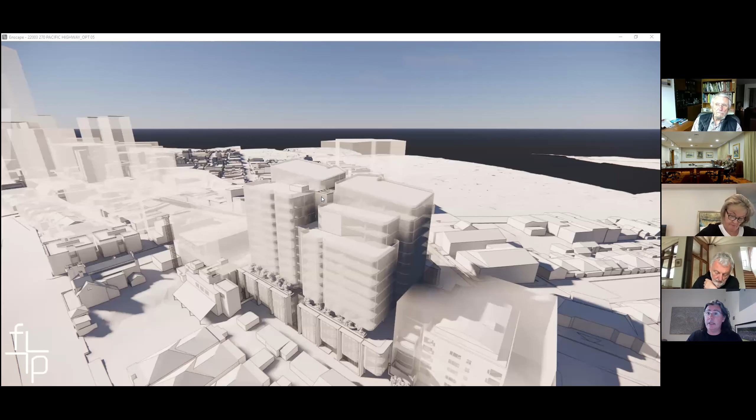So the 59 metres is - and council have observed that they wanted to reduce it to 54, and that 54 should be able to accommodate 13 stories. That may very well be the case. Having said that, what we've sought to do is tier the top of the building. So rather than having a flat level across the entire top of the building, we've tiered it down so that its lowest corner is the southwest corner, which is the leading edge of shadow.

If I jump to some sections, this might become a little clearer. So the red box that we're looking at overall is the height plane that sits inside the shadow envelopes provided by the 2036 plan, and you can see the building sits well below that.

We've additionally, in organizing the 5.6 to 1 above ground, created additional setbacks to the west, to Pacific Highway, and indeed to the two sides as well, and lowered the building. So in essence, what we're trying to do is get the plant room in this top corner, which is the northeast corner of the site that has the least environmental impacts in terms of overshadowing.

Now it's a taller volume than potentially it needs to be. Because this is a planning proposal at this stage, we've left that line run straight through to the top of the building, but there's more than enough room in there for the plant room at the moment. I guess our view of it is it sits inside all of the controls, both in terms of that it's 13 stories, it sits inside the setbacks, and it sits inside the shadow plane.

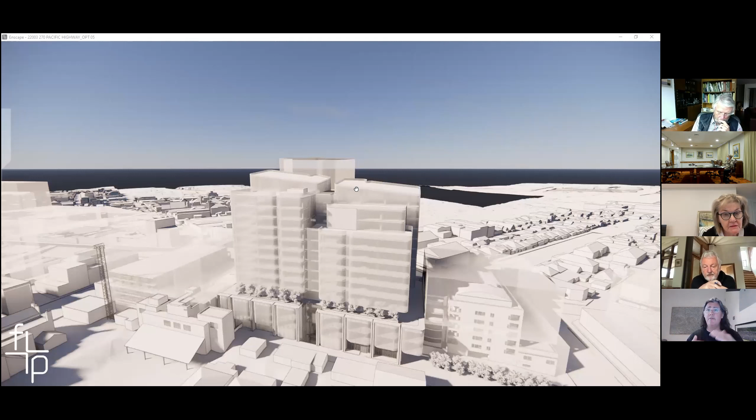We feel like the best time to define the actual top RL of the building will be at DA, when we get more services input and information, because we're constraining the services to the northeastern corner, particularly in the taller volume. We're trying to avoid having to come back and discuss things like cooling towers, which can easily get up to 6.5 to 7.5 meters in height with attenuation on top, and avoid them breaching a height plane. So we've given ourselves some flexibility. We don't think we'll need the whole thing, but we think the time to make that decision is during the DA. So we'd like to leave it where it is, at 59, for the time being.

That was pretty much all I had to say. Right, very well. Clearly height is one of the issues the panel is interested in, and I'll first open it up to other panel members to ask questions. James, John?

James Harrison. I've a quick question for Paul. Given that the North Sydney Council LEP allows architectural roof features, and those features can screen plant, why do you need 59 meters? Why doesn't it work with 54 meters? Well, the simple answer is I'm not sure whether it does or doesn't, because we haven't done the services analysis yet — it's only a planning proposal at this stage. We haven't done the detailed services analysis of what that plant room needs.

I'm just saying we're probably better off giving ourselves some flexibility, and given we fit inside the envelope anyway — the shadow envelope, that is — we didn't see any reason not to give ourselves the maximum flexibility in the first instance, and then design it down once we get into detailed design. Obviously from the client's perspective, he doesn't want to build a taller building than he needs to. The area we're talking about is plant room, not additional floor space.

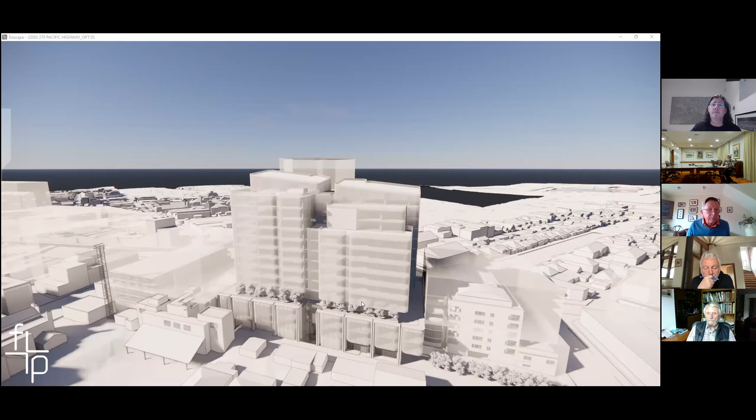Thank you, no more questions. Jen: just following on from James — the council's LEP allows for something like 5.6 meters for an architectural roof to camouflage plant etc. That in itself seems quite generous, so we are concerned about the extent of the additional 5 meters.

Okay, so where are we at then? Sorry, back to your point about the architectural roof feature — it's something I'm happy to carry on with, being at 54 meters as council suggests. I guess we just thought it made more sense to have a bit of flexibility at this point, given we haven't done the detailed design. But if it sits inside all of those envelopes, and if it's the view of the panel that it should proceed with 54 meters instead, relying on architectural roof feature clauses if we need them, that works too.

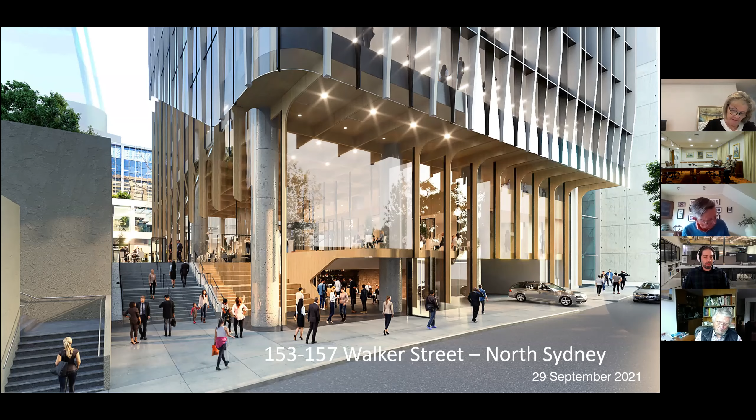Thank you for the introduction. My name is Marco Demick. I'm design principal with Architectus, and we're the architects responsible for this planning proposal. I'd like to thank you for the opportunity to address the panel and provide a response to a few comments that have been raised since last Thursday.

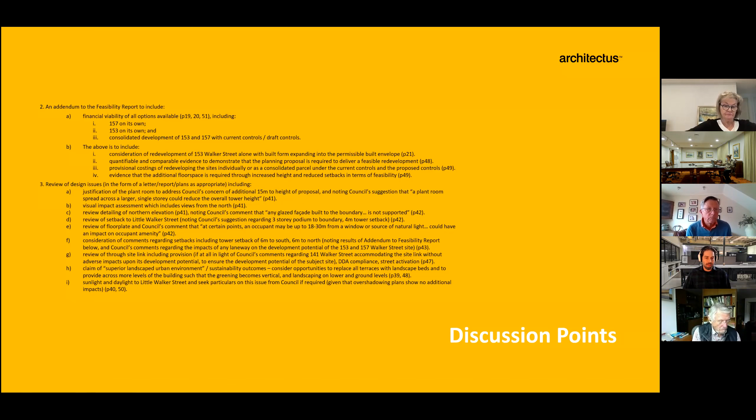As mentioned, the proposal is a result of two years of design iterations and discussions with the council. This was all quite rushed, so I'll quickly go through the key points, and I'm happy to answer any questions at the end, or ideally subsequently meet with the council to work together to get the optimal result.

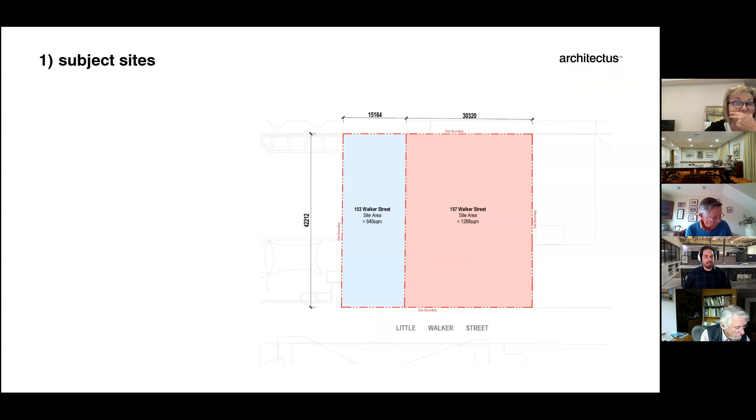I'm sure you're familiar with the subject sites and relevant site areas. There's the small site area on 153 and the corresponding site area on 157, which is still a reasonably small site on its own. While it can be developed under the LEP, it's still a reasonably small footprint for commercial development. The amalgamation of these sites is essential in order to provide a high quality contemporary office development. It allows for sufficient size to provide public domain benefits, building articulation, and the ability to design a workplace responsive to current post-pandemic trends and environmental goals.

This slide simply shows that individually the sites are not feasible to be developed. In the case of 153, the current controls result in less yield than the existing building, for example. And in the case of 157, the resultant scheme cannot even reach a PCA grade quality, let alone provide any of the broader benefits beyond an extremely basic redevelopment—basically just filling the envelope and resulting in a very small NLA and reasonably poor workplace outcomes.

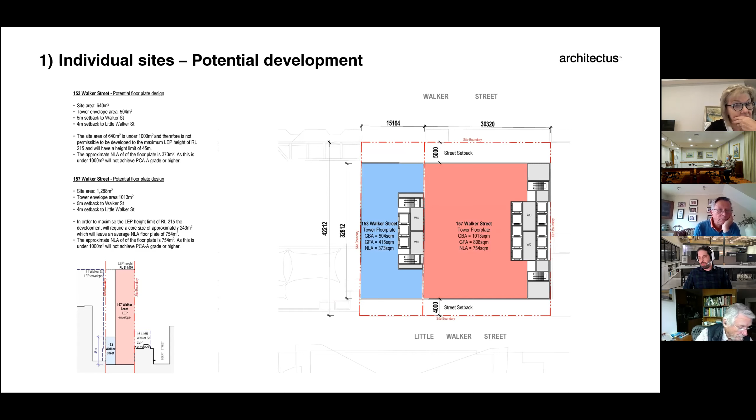In terms of individual sites on 153, even as a non-compliant development, we're obviously restricted, with the site area not being able to get to the maximum LEP height. The site itself is simply too small, even in a non-compliant manner, to be developed due to the small floor plate size.

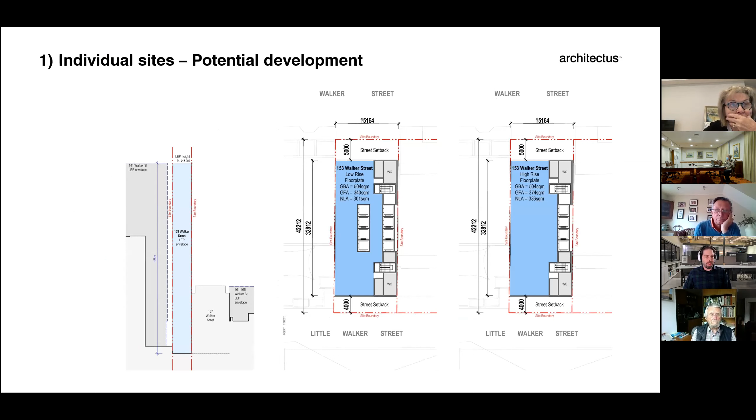One thing to note, as mentioned previously, since the submission of this application the council proposed new draft DCP controls, which through introduction of site setback further invalidate any redevelopment of these sites, including any ability to get sufficient floor plates even with combined sites. That's probably worthwhile noting.

However, the new DCP setback target, as explained in the accompanying documentation, is aimed at providing tower separation. This is not relevant to the northern boundary in particular, because the current LEP height and solar constraint on the adjacent site at 165 basically only allows for a small, four-story or so addition—purely because of the solar controls over Doris Fitton Park and retention of those. So the resultant development, even built to a zero setback to that boundary, will already achieve a difference of over 100 meters between the tower forms, and therefore achieve the intent of the draft DCP controls.

In summary, it's worth stressing that this planning application does not increase yield compared to the current LEP and DCP compliant developments. It has purely been designed to redistribute the allowable floor plate area by locking in a solar-compliant envelope. So when we're asking for the height increase, it's still fitting entirely within the solar footprint of the current LEP controls, and it can deliver a number of key public benefits.

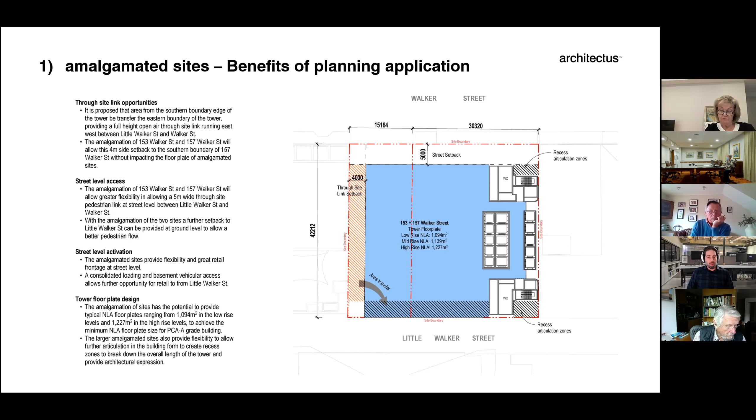The amalgamation and the planning proposal really allow us to substantially increase public domain, to redistribute the floor plate to create open-to-sky through-site links, provision of street activation and a DDA link between the streets, which is currently an issue, and ultimately a tower form that maintains the solar profile of the current LEP while having sufficient floor plate size for a high quality commercial building that can be articulated, so it's not struggling to achieve PCA grade required space or premium, and can provide an appropriate architectural response.

I'll just briefly go to some of the key items raised in the documents issued on Thursday. One note raised was the height increase and the plant room justification. The height increase isn't really there to achieve additional plant. The main intent is to make sure we can activate the floor plate, and while it does create some small plant space, it predominantly houses the lift overrun.

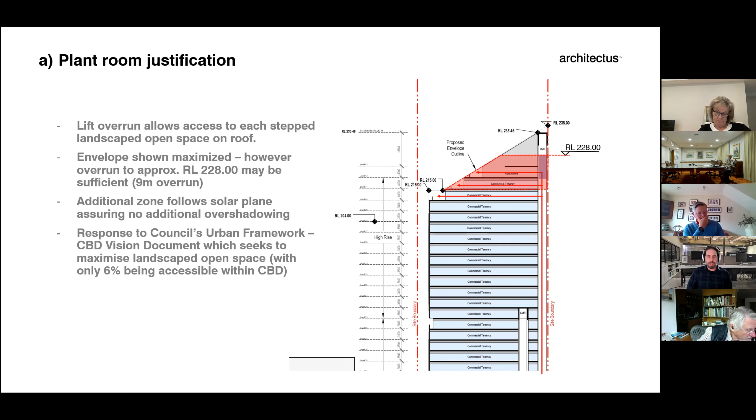That lift overrun allows us to access a series of communal open spaces within the roof. The actual form of the envelope presented in the documents is entirely just a solar plane above RL 215, and the form has been infilled to create an architectural response within that in a reference design. This response to create communal spaces is in direct response to Council's urban framework document, which identifies North Sydney CBD as devoid of properly publicly accessible space, with only 6% being accessible within the CBD. This allows us to create a series of communal spaces accessible to the inhabitants of the building.

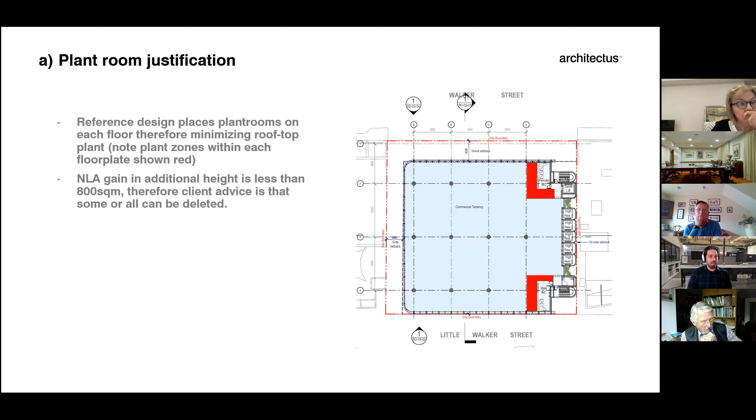As mentioned, the reference design places plant rooms on each floor, so it's a by-floor system. But as Alice noted earlier, one concession is there's a very small amount of actual NLA within that additional height. Personally, we think it'd be a pity not to utilize that height for articulation, with only 800 square meters of that space beyond RL 215 — something the client is certainly willing to delete.

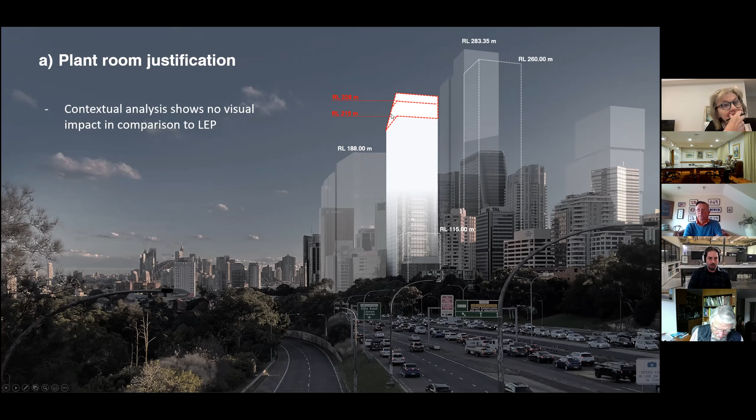Based on the contextual analysis, this is showing the envelopes. The 110 Walker outline, shown here as RL 283, has been submitted as a DA, and there are a number of sites alongside Arthur Street. We don't see that addition of height in the northern corner having a substantial impact — if anything, it sits equally within the general assembly of the building forms. The actual overrun to access only requires an additional 13 meters or so to reach those 3 levels. We've extruded that envelope based on no overshadowing to neighboring areas.

Another point raised was the visual impact of the northern facade, especially built to zero setback. What we've shown is an architectural response that places panoramic lifts alongside that facade, creating a dynamic and interesting architectural response. It allows us to ventilate the facade, and we're not reliant on any daylight access to the north, so it doesn't really affect anything in terms of development at 165.

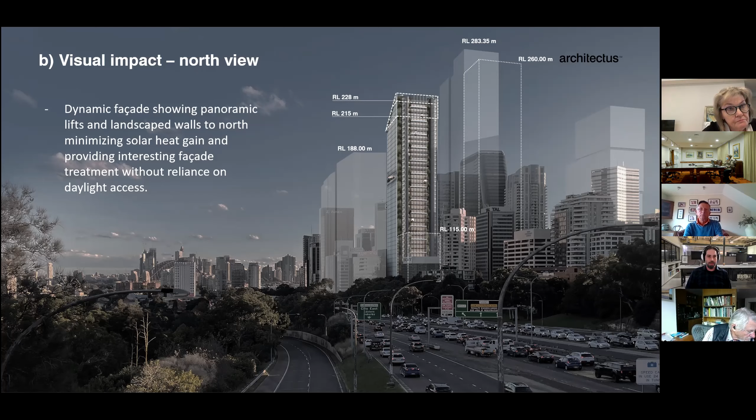You can see here in dotted lines the LEP compliant height of that development — only an additional 4 stories beyond the current building. You can see the big difference between those heights, which is in line with those targets, so there's no reliance on daylight access from there. By placing the core element, we allow for green walls and ventilation of those areas, and pyrolytic glass can deal with any boundary issues, effectively creating a mass to the north that deals with the environmental issues.

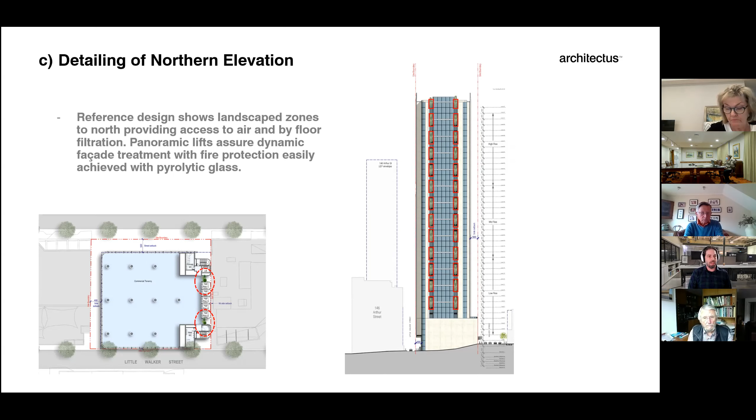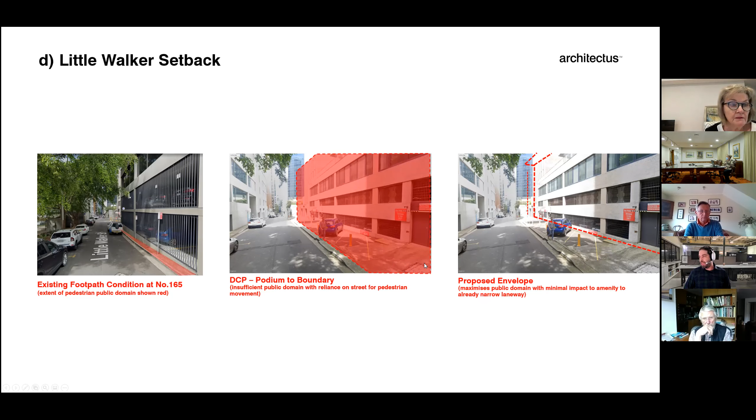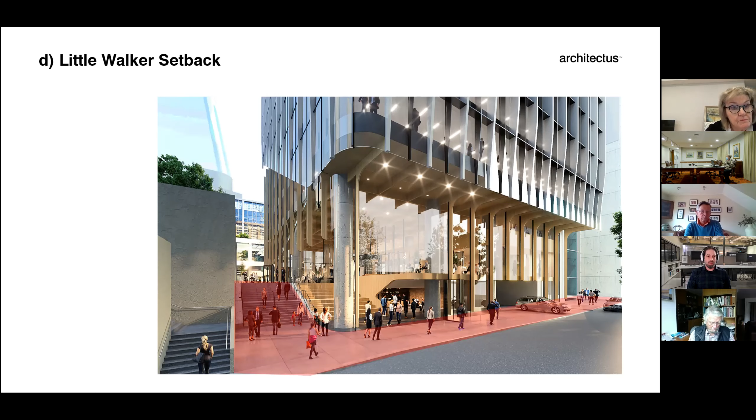What the proposed envelope does is create a recessed form at the base that allows for a 5 meter setback to Little Walker Street. It also creates a 5 meter through-site link connecting it to Walker Street, creating ample opportunity for activation and extension of the public domain within the building footprint, as well as the ability to create disabled access between the two streets.

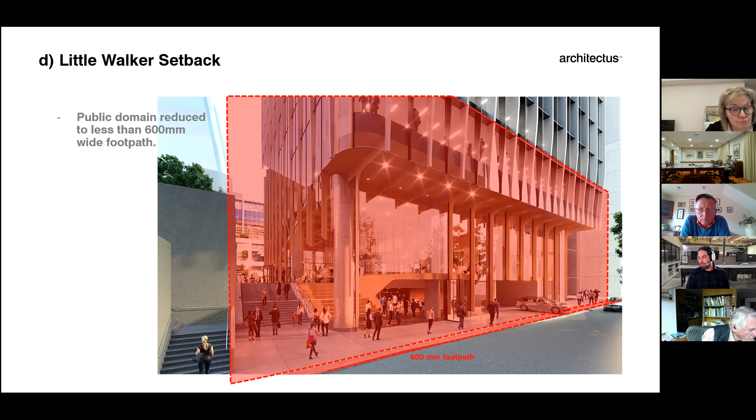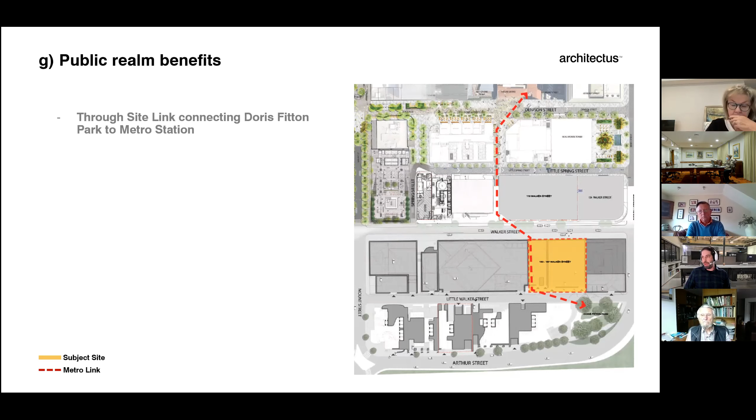In comparison, this is what a compliant podium envelope would look like, basically congesting that public domain entirely onto a service laneway. This has been developed over 2 years worth of meetings and negotiations with the council. It sits within a broader vision for the urban network of the CBD and creates an important link from the station in an east-west direction all the way to one of the few parks in the North Sydney CBD, the Doris Fitton Park.

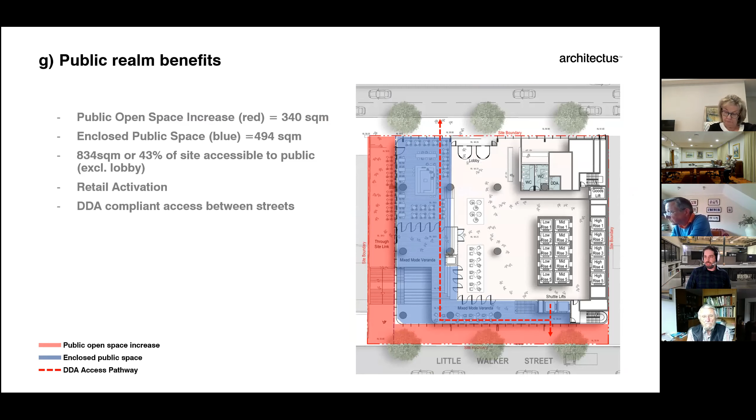In terms of the numbers, we are providing some 834 square meters, or 43% of the site, accessible to the public — this excludes the lobby, it's purely accessible space. The zone in red shows it open, and the zone in blue shows a mixed mode veranda, envisaged in the document to create a disabled link and transition between levels, as well as retail activation.

Just a couple of last notes — one on the floor plate size. It's very comparable to recent developments: 110 Walker, 100 Mount Street, which is one of ours, and 1 Denison. Again, well beyond PCA grade access to daylight, in premium grade territory, and it's reasonably still a small floor plate.

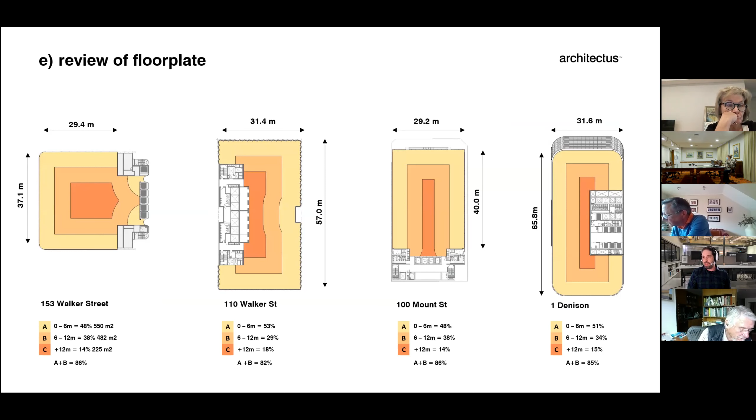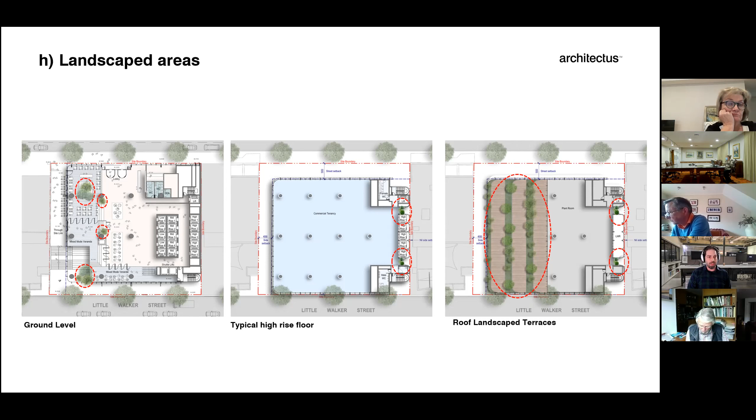The reference design envisages a number of landscape zones in terms of wellness and provision for landscape zones within the floor plate. That's exactly what the envelope allows us, because we're no longer so congested in trying to meet that 1,000 net PCA grade requirement.

Finally, the last point is one of the notes council raised: the issue of reversed setback to Little Walker Street. Obviously there's a huge benefit to that transition of floor space. So following the council meeting, we've taken that floor space from the through-site link and placed it onto Little Walker Street.

But as Elise suggested, our client, obviously if that's no longer supportive, and if that advice has changed, while it's a pity, we could consider putting that floor space back into that zone over the through-site link. That brings me to the end, but happy to answer any questions.

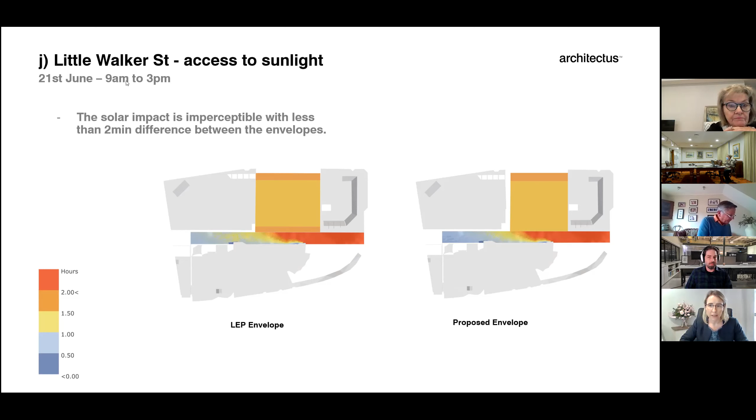Thank you. Perhaps if we pass to Josh now, because Josh was going to talk about the structure of our proposal and then summarise, if that's okay. I'll just check with the panel to see whether we've got any questions of the architect at this point.

John, James, and Ken. Just a question, Jan, of Marco, Mr. Danek. You've probably read in the report that it's stated there is no substantive evidence that a consolidated proposal can't be feasibly erected under the current controls. Do you disagree with that?

To a degree, I think a proposal that delivers this degree of public benefit will not be able to be developed. What we're trying to achieve is create capture in the envelope, through site links and connections, while still retaining that. The current envelope allows for the LEP 215 RL, so in terms of commercial yield it's very similar, John. But in terms of public benefit, this development tries to lock in some of those key criteria in the envelope. I'm sorry, but you really haven't answered my question. Why can't you do all of those things under the current controls?

Well, I can step in if you like. Good afternoon, Mr. McInerney. One of the issues we've had, just with the short notice, is that we were unable to get our financial and economic expert to join us today. However, Marco, one thing that would perhaps be useful is if you could talk to your experience on some other projects within North Sydney, particularly the impacts of setbacks on both sites and the implications with respect to feasibility. Also, Josh Owens, who is also speaking today, intends to summarise some additional materials which we will get to you with respect to feasibility, including a look at all the various options and providing that information to council. Unfortunately, today we don't have it in a form we can share, but we intend to do so.

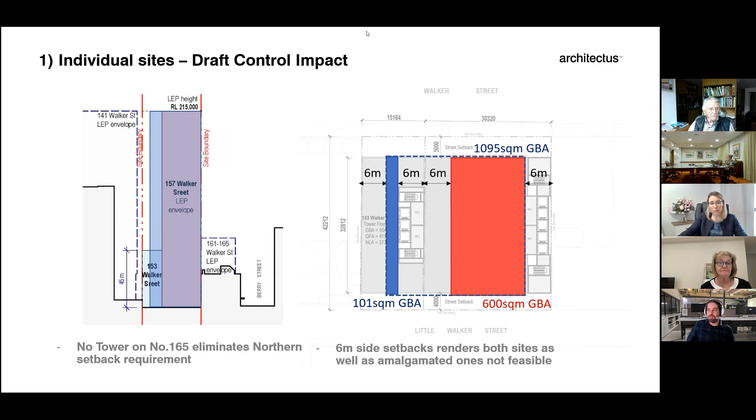Do you have some questions, James? I've just got one thing I would like clarified, and maybe it's a question to Elise.

Are you asking the panel today to defer consideration of this planning proposal, or are you asking us to do something else? Deferring consideration is one option.

Equally, if you have inputs to provide to council in terms of ongoing engagement with us to take forward some concessions we'd like to make, Josh and Marco have both referred to discussions we've had with council. I wasn't privy to those discussions, but they happened prior to lodgement of this proposal. Essentially our client and the applicant lodged the planning proposal, and this is the first opportunity we've had to hear from council since that lodgement.

We would like the opportunity to continue developing the proposal, given this is the first time we've seen council's thoughts. We're disappointed with what's there, but equally we want to work with council and address all of council's issues. Deferring it, we'd be pleased with that outcome, but perhaps you would also wish to provide council with your recommendations for next steps with us.